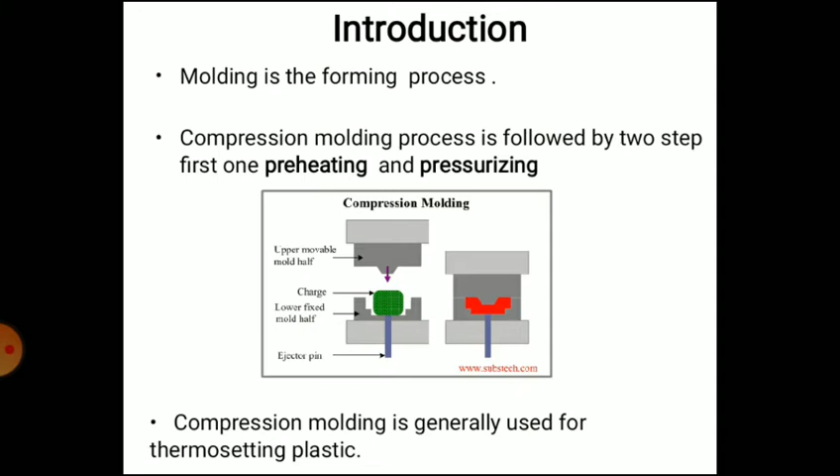Molding is a forming process. Compression molding process is followed by two steps: first preheating and then pressurizing. This method is mostly used for thermosetting plastics but can also be applied to some thermoplastic materials. Compression molding equipment is usually simple, and it is generally used for thermosetting plastics but also for some types of thermoplastics.

This is a unit used for compression molding. At the top there is an upper movable mold half, and at the bottom there is a lower fixed mold half. The charge or raw material is placed on the lower fixed mold half. At the bottom there is an ejector pin, used to eject the component after solidification.

Compression molding equipment is usually simple. It employs a hydraulic or pneumatic press to apply pressure, connected to the upper movable part. The molds are usually made of tool steel and are polished or chrome plated to improve material flow and product quality. These molds are heated by electric heaters, steam, oil and gas furnaces.

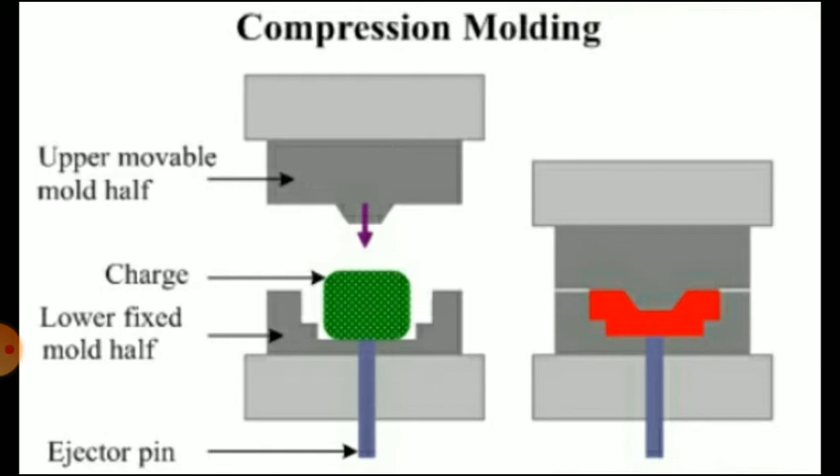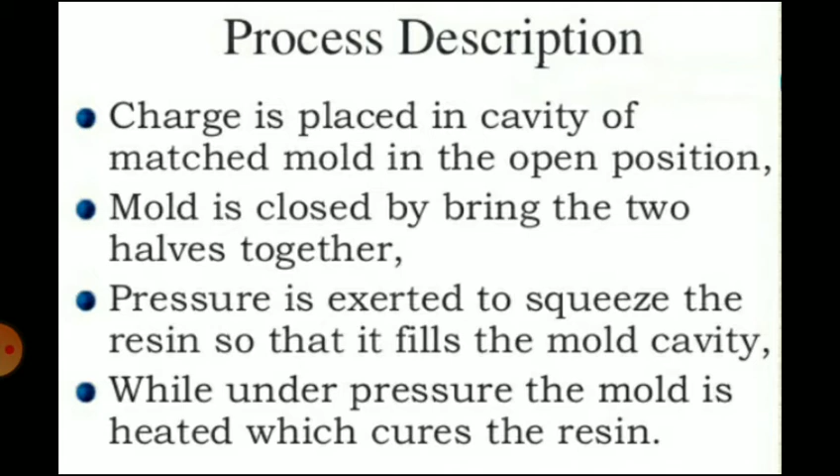Regarding the process: a pre-measured quantity of plastic in the form of powder or a preformed shape, called a pellet, is placed in a heated mold. Pressure from 150 to 700 kg per centimeter square is applied and held for a curing period. The charge is placed in a cavity, the mold is closed to bring the two halves together, and pressure is applied. After curing, the ejector is used to eject the finished product from the mold cavity.

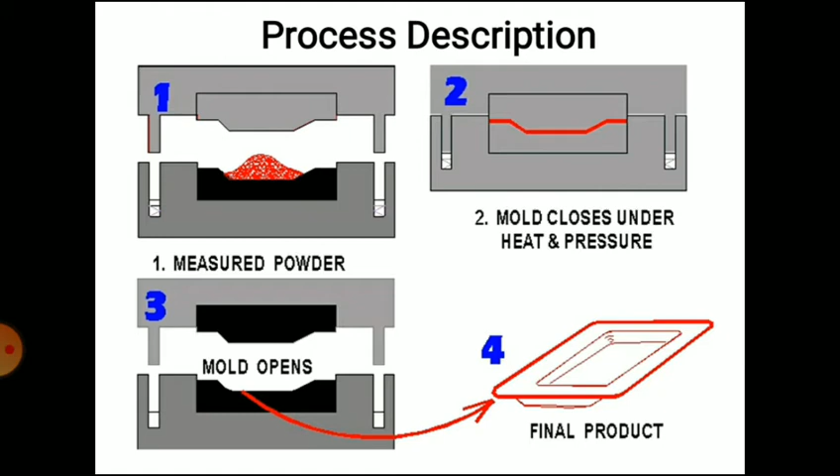Step 1: the pre-measured quantity of plastic, in powder or preformed shape, is placed in a heated mold. Step 2: the mold closes under heat and pressure. Step 3: after applying pressure, the mold opens. Step 4: the final product is ejected with the help of the ejector and taken out. Materials used are thermosetting polymers, fiber reinforced composites, and some thermoplastics.

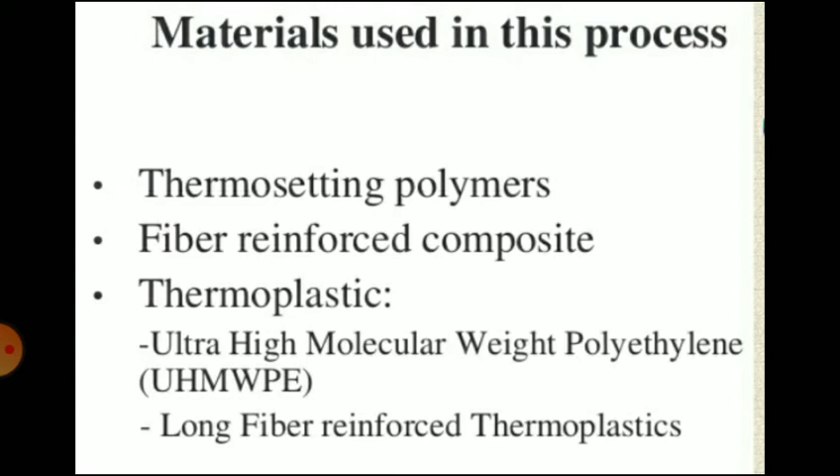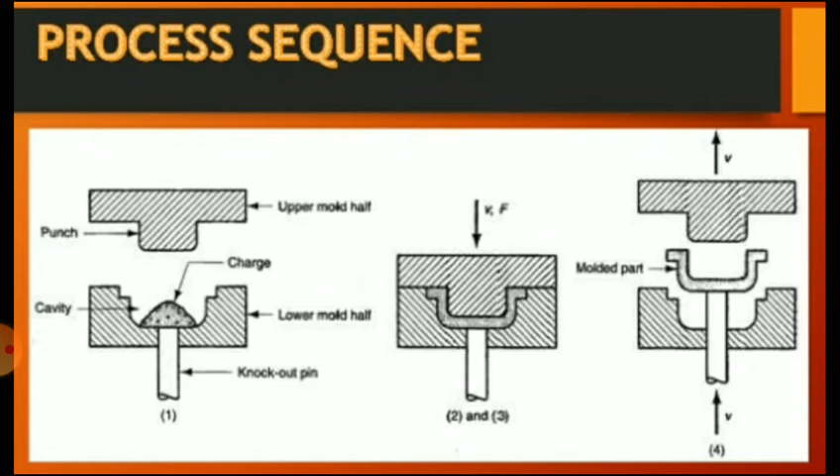The processing sequence is shown: first a pre-measured amount of charge is placed, then pressure is applied, and then the mold opens and the part is taken out. Advantages include low cost, uniform density, uniform shrinkage due to uniform flow, improved impact strength, dimensional accuracy, minimized internal stress and warping, short cycle time, and high volume production.

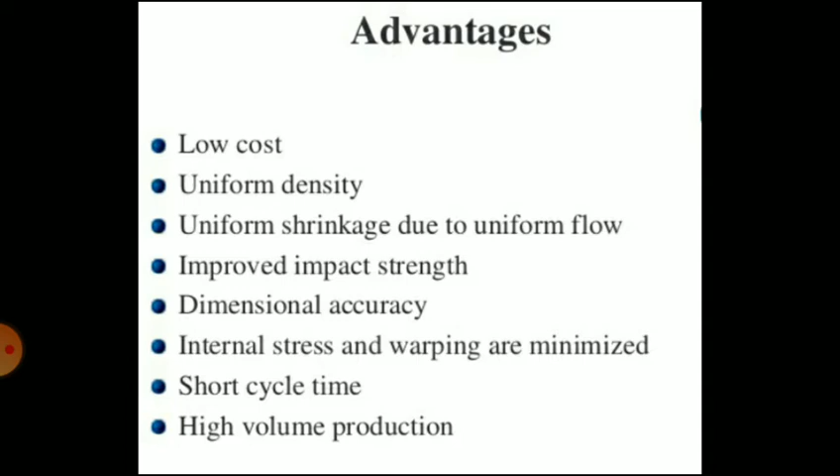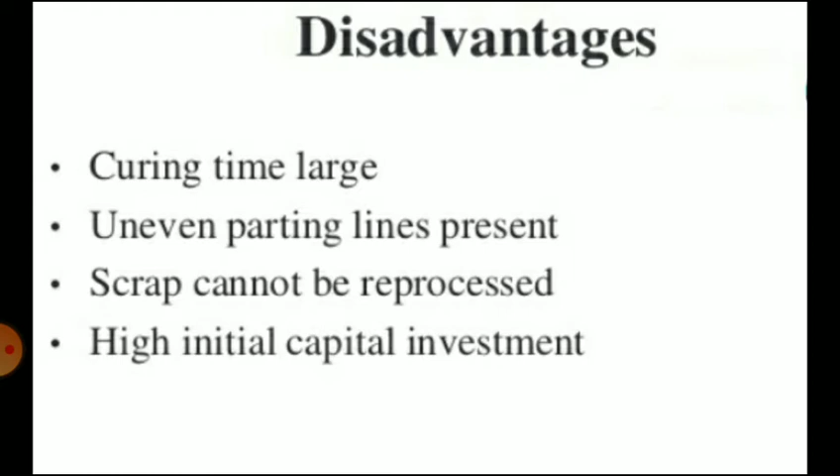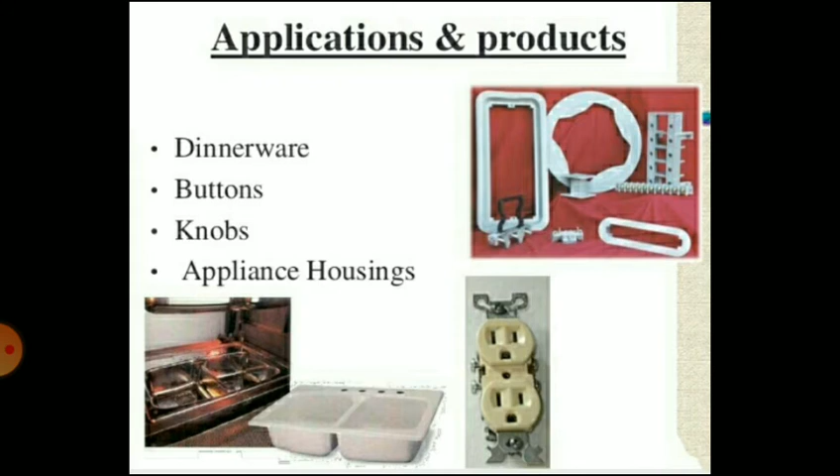Disadvantages: curing time is large, uneven parting lines are present, scrap cannot be reprocessed, and there is a high initial capital investment. Applications include dinnerware, buttons, knobs, and appliance housings.

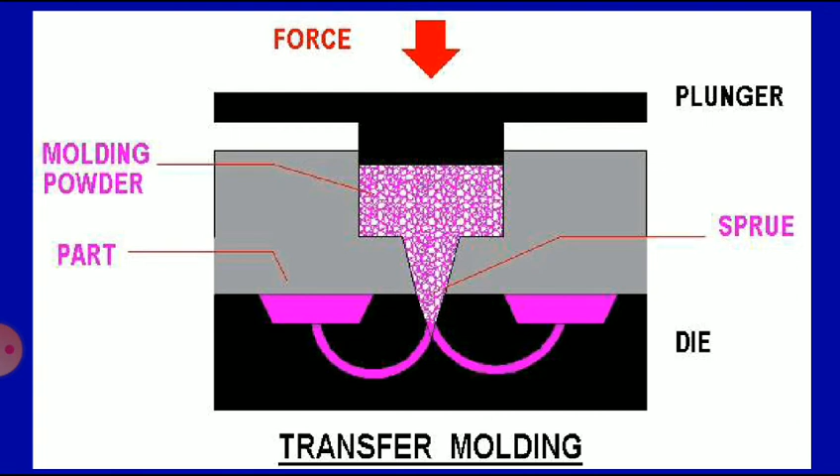In compression molding, the material does not flow into intricate parts of complex molds. Also, the pressure required is very high because the material is introduced in the mold in solid state and has to plasticize and flow within the mold itself. In order to overcome this difficulty, the transfer molding process is used.

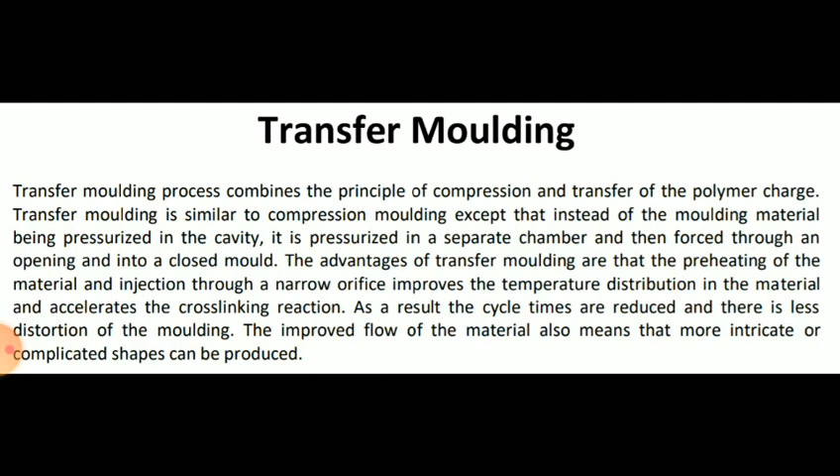In the transfer molding process, heat and pressure are applied to the thermosetting material in a chamber outside the mold. There is a mold cavity at the bottom where raw material is not placed; instead there is a chamber outside the mold cavity where the raw material is placed and pressure is applied. That is the difference between compression molding and transfer molding.

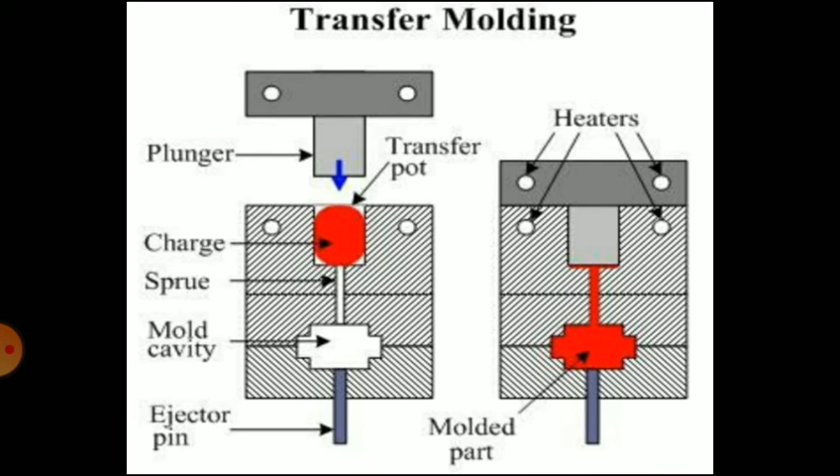When the thermosetting material becomes fluid, it is transferred into the mold through the sprue and gate under pressure. At the bottom of the charge there is a sprue through which material enters the mold cavity. At the bottom there is an ejector pin used to eject the component after solidification. The mold is held under pressure until the product is completely cured, and it is used when the product requires good tolerance and surface finish.

This is the molding sequence. The required amount of polymer charge is weighed and inserted into the transfer pot before molding. The pot is heated by the heating element. The liquid charge is gravity filled through the sprue into the mold cavity. A piston, plunger or ram arrangement is used to apply force in the transfer pot so that the resin is transferred into the mold cavity. The plunger is also preheated in the transfer pot.

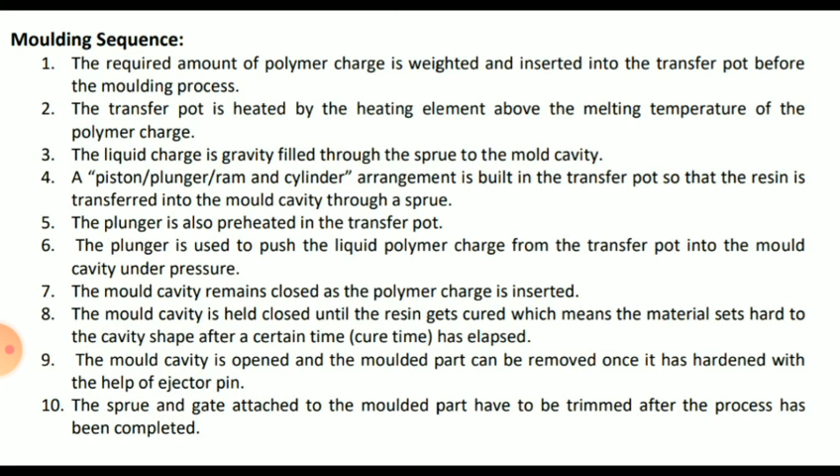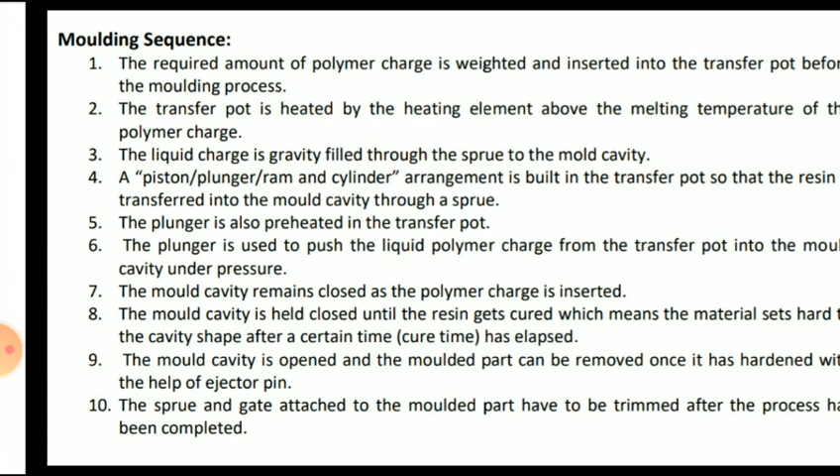The mold cavity remains closed as the polymer charge is inserted, and after curing, the mold opens and with the help of ejector pins the object is taken out. Advantages: fast setup time and lower setup cost, low maintenance cost, more intricate or complicated shapes can be produced, plastic parts with metal inserts can be made, design flexibility, dimensionally stable, uniform thickness of parts, and large production rate.

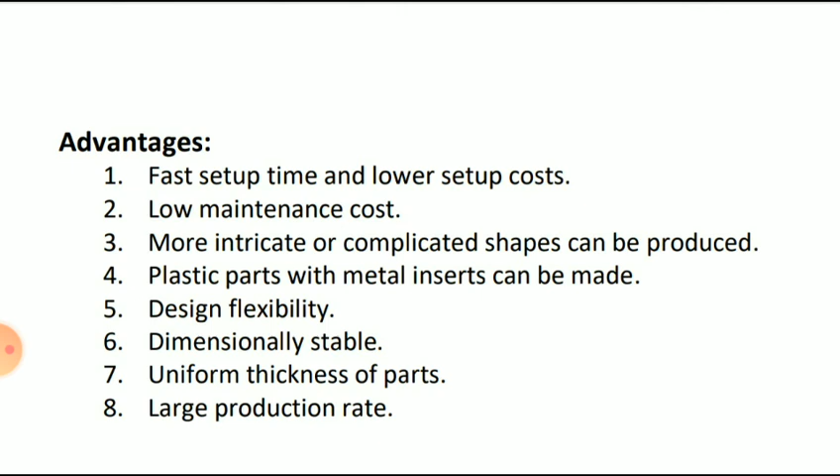Disadvantages: warpage is more of a problem because the flow of transfer materials is softer and shrinks more than compression grade materials. The scrap rate for transfer molded parts is usually higher than compression molded parts because of added scrap from the cull and runner.

Air can be trapped in the mold, which is another disadvantage. To prevent the mold from opening slightly, which results in heavy flashing of the parts, the clamping tonnage for transfer mold parts is greater than for compression molded parts, so a higher tonnage press is required.

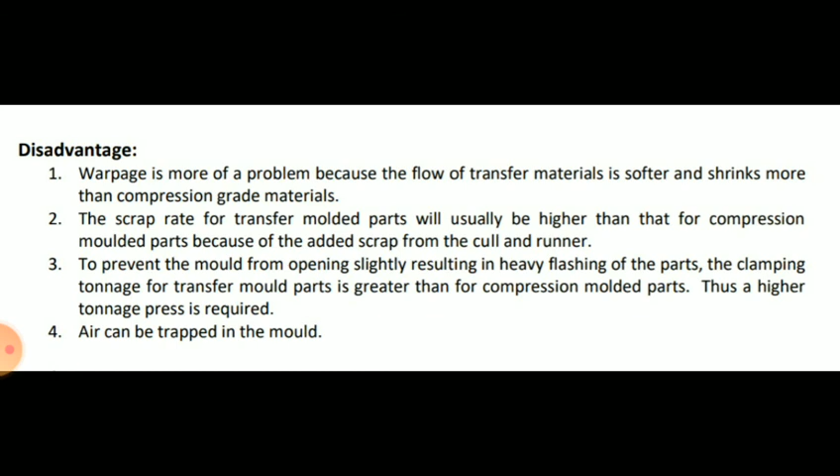Applications: this process is widely used to encapsulate items such as integrated circuits, plugs, connectors, pins, coils and studs. It is suitable for molding with ceramic or metallic inserts placed in the mold cavity. When the heated polymer fills the mold, it forms bonding with the insert surface.

So this is regarding the processing of thermosetting plastics. Thank you.